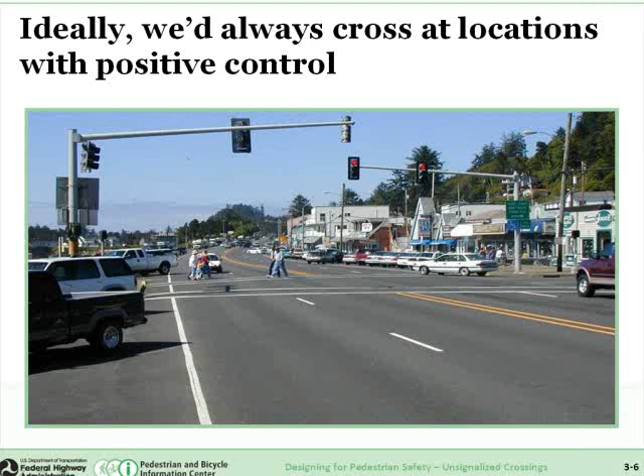Okay, and some people say, well, ideally we'd like to have pedestrians cross at a location with positive control, traffic signals. And while that may be appropriate, certainly at busy intersections or busy crossings, it's not always the best solution because, first of all, we cannot provide traffic signals everywhere, every 10 feet along our highways. That would be utter chaos. Traffic would slow to a stop.

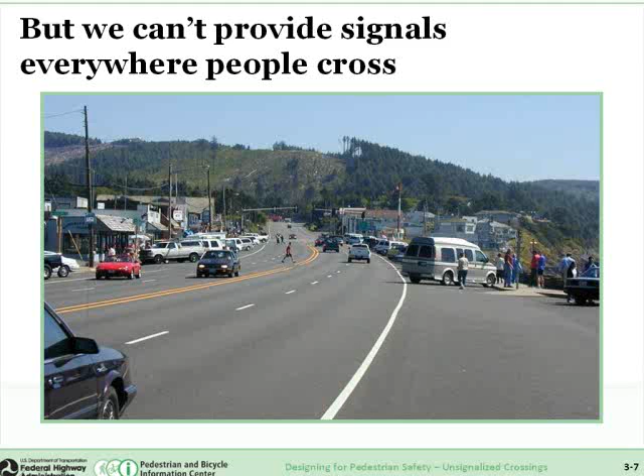And secondly, we know that many of our high pedestrian crash locations and high vehicle crash locations do occur at signalized crossings. So signals certainly have their place, and they're certainly appropriate in some conditions, but they're not the magic solution everywhere. We know motorists still can run red lights. Often motorists fail to yield to pedestrians when turning on a green, and other problems can occur.

And we know that these pedestrians are not criminals. Here we have provided parking on the right side of the street, and we have the stores on the left side. So people are going to naturally park in the parking areas and then cross the street, often where it's most convenient or the shortest distance.

And it may not always be possible for pedestrians to walk a block or two or three down to the signal to cross, plus knowing that that's not necessarily going to be an ideal location to cross anyway. And we also don't know whether there's a sidewalk on the right side for them to walk to get to the signal. So we just need to be thinking about pedestrian needs.

Also, pedestrian behavior. We know that some pedestrians use crosswalks and others tend not to. We know, for example, from the research that senior pedestrians, older pedestrians, are more likely to choose to cross in the marked crosswalks and to walk to the signals to cross, even though they do have some challenges sometimes to get to these crossings.

So let's look at a few basic principles. First of all, pedestrians want and need to cross the street safely. Hopefully we can all agree to that. Secondly, drivers need to understand pedestrians' intent. And we often see crashes involving pedestrians at unsignalized crossings where the pedestrian just doesn't know what the motorist is going to do and vice versa.

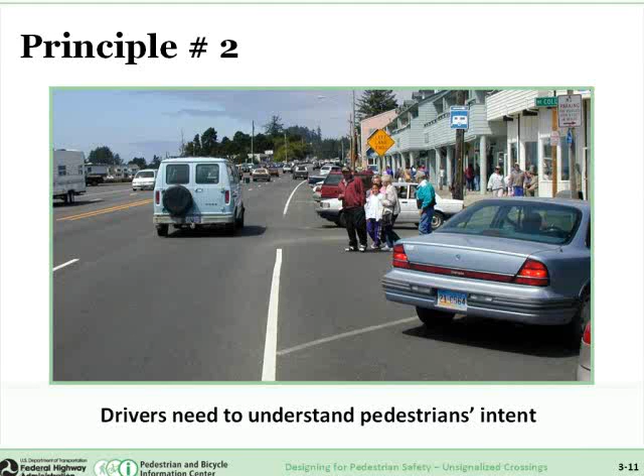But they asked the driver, why did you hit the boy? Didn't you see him crossing in the crosswalk? And the driver said, yes, I looked down, saw the boy, saw that he saw me, and I assumed he would wait for me. So here's an example of just misunderstanding about the rules of the road. At a legal crossing, the driver should have yielded to the pedestrian, and certainly the pedestrian assumed that would be the case.

Another principle, we need to try to keep our crossings short. We know that for long crossings, pedestrians are in the road for a long time, and that can lead to crashes. We also know that can result in increased motorist and pedestrian delay. And it can decrease the ability of slower pedestrians like this lady here to really be able to cross safely.

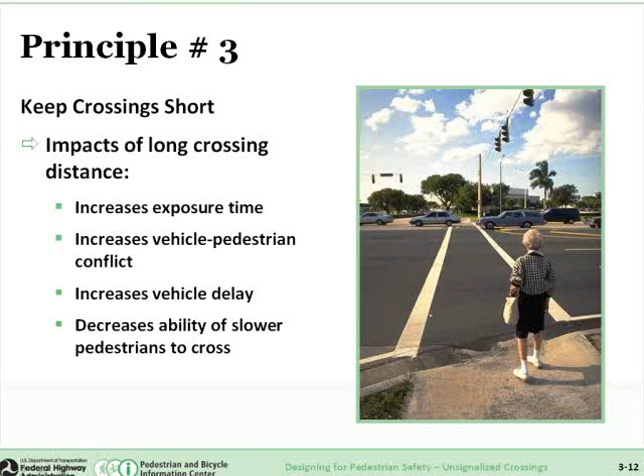There was an older lady in Los Angeles that didn't have enough time to get across the street during the walk signal a couple years ago. There's a newspaper article where there was an officer on the scene, and because she was delayed in finishing her crossing, vehicles got the green light and had to wait for her. So the officer ran over, gave her a ticket for slowing up the intersection. So her crime was that she didn't walk fast enough to meet the signal timing. So this is not the kind of environment we want to create.

The next issue relates to speed. There are three different ways that high vehicle speeds can increase the likelihood of pedestrian collisions: the reduced field of vision, the reduction in the motorist's ability to react in time to avoid the crash, and then increased crash severity at higher speeds.

Oftentimes we see collision reports where the driver hits a pedestrian and then gives a statement to the police: well, the pedestrian came out of nowhere. Well, the pedestrian didn't come out of nowhere. The driver just wasn't watching and was really fixing their eyes on the horizon ahead. And this is often what we see for the higher speed roadways.

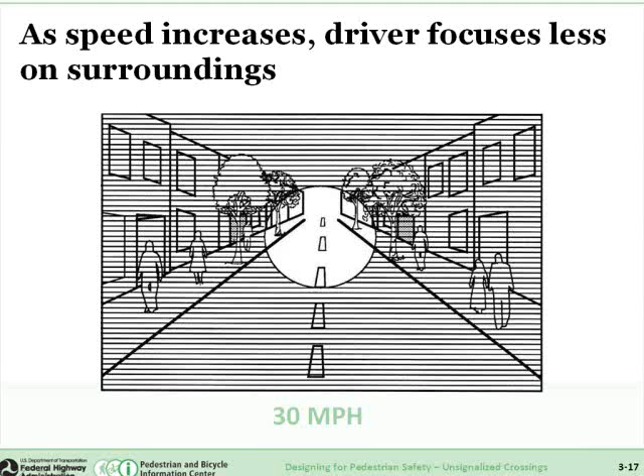And then the other component there is the braking distance. How long it actually takes a motorist to come to a complete stop after they've hit the brake. So if you look at the relationship between speed and stopping distance, you can see that at slow speeds, around 10 miles an hour, a motorist can stop in about 50 feet, whereas when they're going as fast as 40, it may take more than 300 feet to stop.

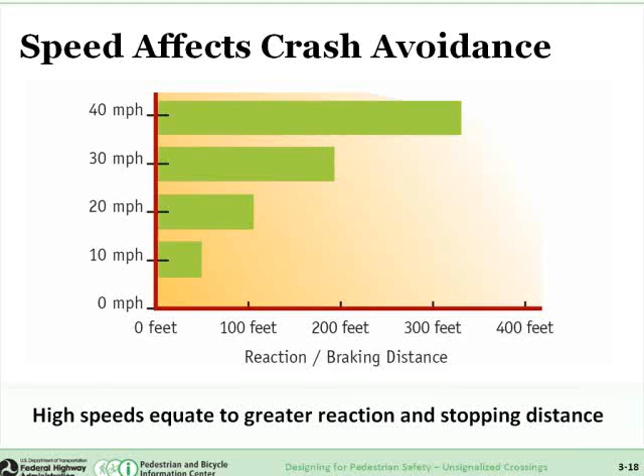Okay, the other factor with speed relates to the probability of death from a pedestrian that's struck by a motorist. And you can see, based on research from Europe a few years ago, if a motorist is traveling 40 miles an hour when they strike a pedestrian, there's about an 85% chance that pedestrian will die. If we can do something with the street design to get the speeds down to 30, that reduces the chance of death down to about 45%. And further down to about 15% if we can get the speeds down to around 20.

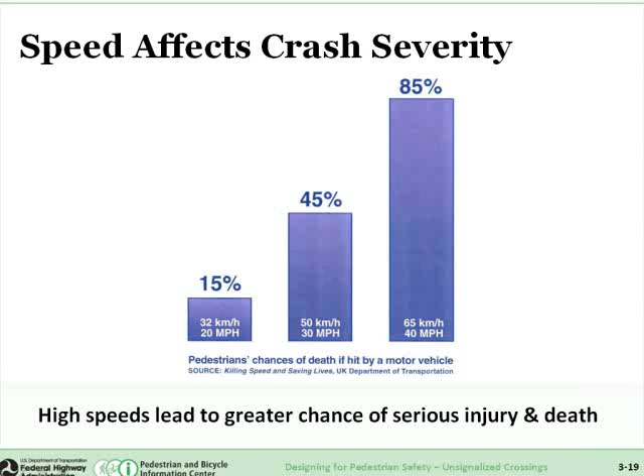Principle 5 says pedestrians will cross where it's most convenient. And again, humans will do what they feel is appropriate for them. People often want to use the shortest distance between 2 points. And while some pedestrians will go out of their way by several hundred feet to cross, most of us won't. Most of us will cross where it's quickest to get across the street. Now, as the volumes get higher, then that starts to complicate things. But just something to keep in mind as we're designing for unsignalized crossings.

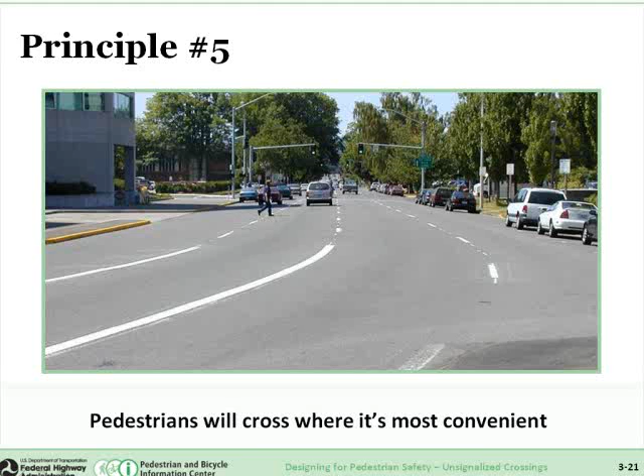Okay, now the issue of intersection versus mid-block is a little bit complicated because many of us have been taught from the time we were young to go and cross at the intersection, that was safer. And some of the research that's been done, some of the research we've done, actually indicates that whether a pedestrian is crossing at a mid-block or intersection doesn't make a significant difference when you take into account other more important factors like the number of lanes, the vehicle speed, traffic volume, sight distance, and things like that. So it really depends on other factors.

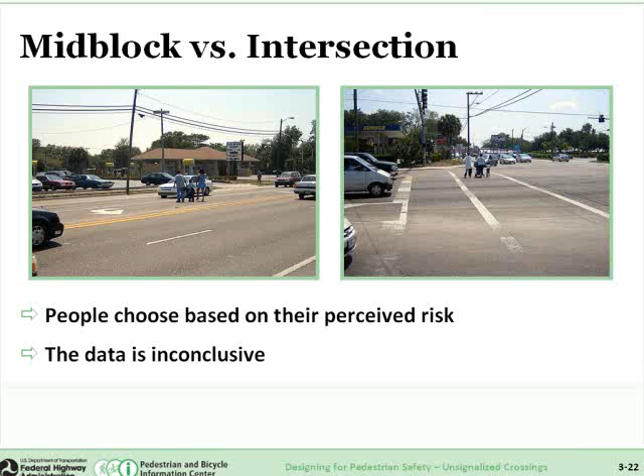Okay, Peter, could you just say a little bit about some of the new federal discussion, particularly by the Secretary of Transportation, about the need for us to provide for pedestrians? Yeah, Charlie. Recently, back on March 11th of 2010, Secretary LaHood put out a memo. It's the United States Department of Transportation policy statement on bicycle and pedestrian accommodation regulations and recommendations.

And this can be found on the web, but one of the important things that he stated in this memo was considering walking and bicycling as equal modes with other transportation modes, which is really huge and supports peds and bikes. And just something else to highlight, it says walking and bicycling should not be an afterthought in roadway design. So this memo was signed on March 11, 2010, and it was announced on March 15th.

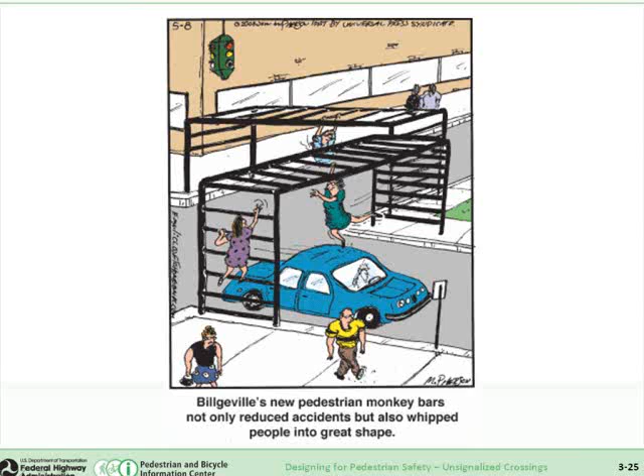Okay, what we don't want to do is end up having to make our citizens think they have to use these climbing bars, monkey bars, in order to get across streets safely. So often the public realizes some of the difficulties of getting across the street, and so you see these kinds of cartoons in different newspapers. But let's talk first about, what are crosswalks, why are they used, when should they be used, and what are some of the issues surrounding them.

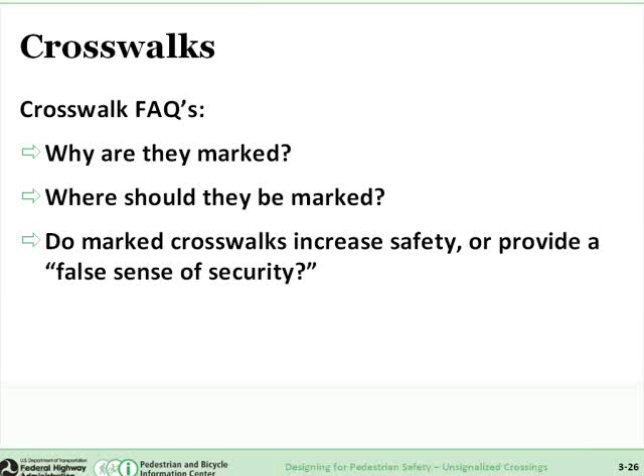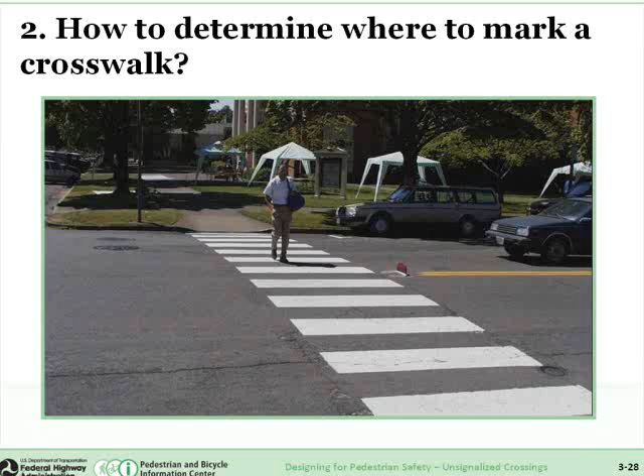We know that crosswalks are provided for two basic reasons. Number one, to indicate to pedestrians where it's a preferred crossing location, and two, to indicate to drivers where they might be expecting pedestrians to cross. And then the next question we have is, so how should we determine where to mark a crosswalk as engineers and planners? So I'm going to ask Peter to say a little bit about what's in the most recent MUTCD, Manual on Uniform Traffic Control Devices, the 2009 version.

Sure, Charlie. And thanks. You're going to go into the study a little more here, but based upon the latest research with regards to marked and unmarked crosswalks, the 2009 MUTCD picked up this information and incorporated it into the new MUTCD. So crosswalk markings provide the guidance for pedestrians who are crossing, as you stated, and for the driver as well. But did you want me to get into a little more about the actual MUTCD wording, or I can maybe provide that link as well? It's in section 3B.18 under crosswalk markings as far as the research to the study. Yeah, that's fine. And many of the engineers out there have seen the new MUTCD.

Okay, so if you see now the next photograph that says determine where to mark a crosswalk. And certainly we need to consider the origins and destinations of pedestrians. You can see in this case we have apartment buildings on the left, we have stores and bus stops on the right, and so this would be a logical place to put a marked crosswalk. And you can see they provided a raised median island here as well.

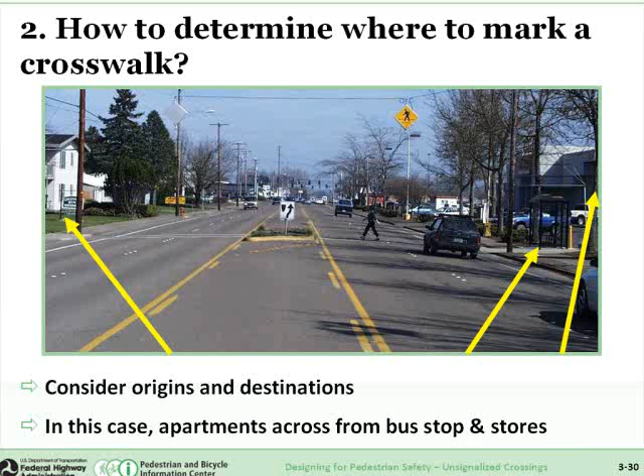Okay, and I might add that there are many locations that are not suitable for just a marked crosswalk alone. And here are some of the factors, examples. This location is not good to put a marked crosswalk because there's really no one location here where pedestrians would likely cross. Lots of fast food restaurants and different businesses, service stations, etc., along this arterial street. So it wouldn't make sense to just put in a crosswalk.

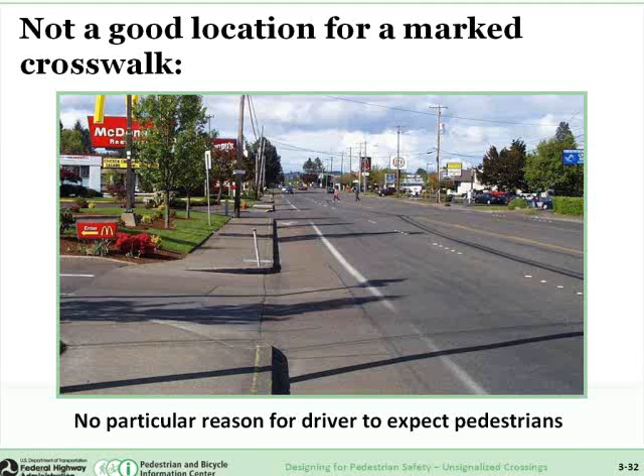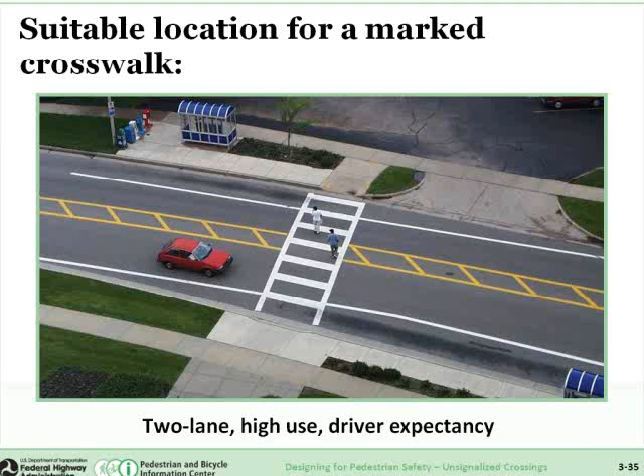Here's another suitable location for a marked crosswalk. It is actually near the Smithsonian Institute in Washington, D.C. They actually have a very wide marked crosswalk, lots of pedestrians there, low speed, narrow two-lane road, and it would be a place where motorists would very likely be expecting pedestrians and then very likely yield to them in a crossing like this.

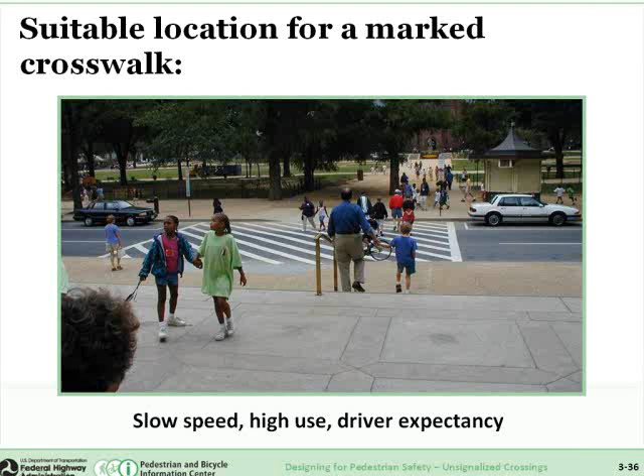Okay, the next question is, but do marked crosswalks increase safety or encourage people to cross without looking? So I'm going to say a little bit about a study we did a few years ago for Federal Highway Administration where we really tried to address the question, is it safer to mark crosswalks or not mark them at unsignalized or uncontrolled locations? And many of you know there had been some research done starting in the 1970s by Bruce Herms in San Diego, for example, that said that having a marked crosswalk had an increased risk of pedestrian crashes compared to an unmarked crosswalk.

And for years after that, many cities in the U.S. simply wouldn't put in marked crosswalks unless there was a traffic signal there or maybe unless it was in a school zone. And so essentially, when we did our study, we really wanted to look at this issue and use data from cities around the U.S. So we ended up using around 2,000 crosswalk locations in 30 U.S. cities. We collected 5 years of pedestrian crash data. We collected pedestrian volume, traffic volume, number of lanes, speed limit, and other roadway factors.

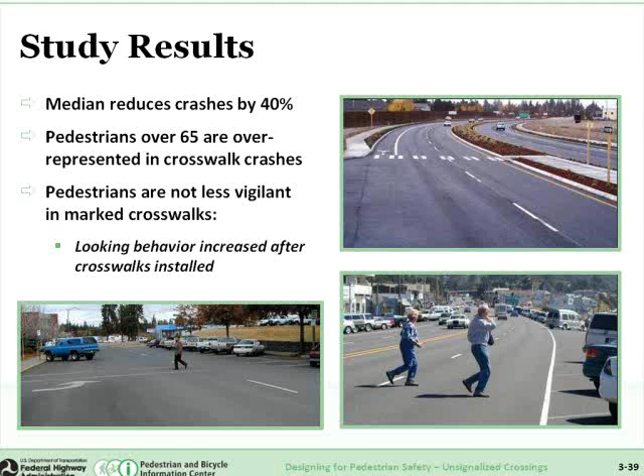We also had a study done at the same time of ours to look and see why this was happening. And they looked at pedestrian behavior and driver behavior. They did not find that pedestrians were being more careless or using less caution in the marked crosswalks, which was kind of an interesting finding, at least on the 2- and 3-lane roads. But we're going to look at some other issues in just a minute. I'm going to give you the second reason in a minute why the marked crosswalks had more crashes and what we can do about it.

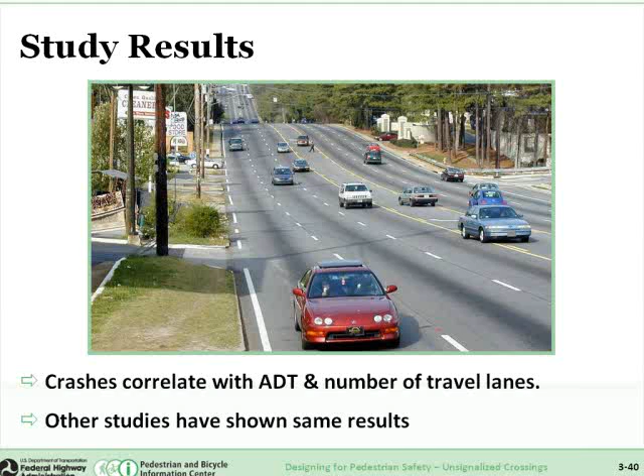As I said, the higher volume roads with a greater number of lanes were the ones that had the most pedestrian crash risk and the ones of most concern for pedestrians in general. And here's the other reason. The main reason why crashes increase in the marked crosswalks and multi-lane roads that are high volume is because we had a number of these what we call multiple threat crashes.

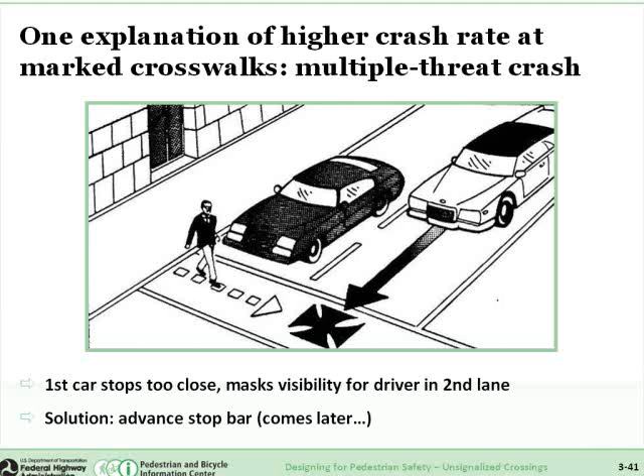Okay, so essentially our recommendations were that it's okay to mark a crosswalk on two-lane roads or the low-volume multi-lane, but on the higher-volume multi-lane, we need to do more than just mark crosswalks alone to help pedestrians get across the street.

And really the key is the new marked crosswalks alone, right? That you don't want to just put crosswalks out there by themselves. You do want to use them in conjunction with other countermeasures that you're going to be bringing up. And it recognizes that just marked crosswalks alone under these type of conditions should not be done. So it's really the greatest and latest guidance for how agencies should be looking at their crosswalk markings inventories.

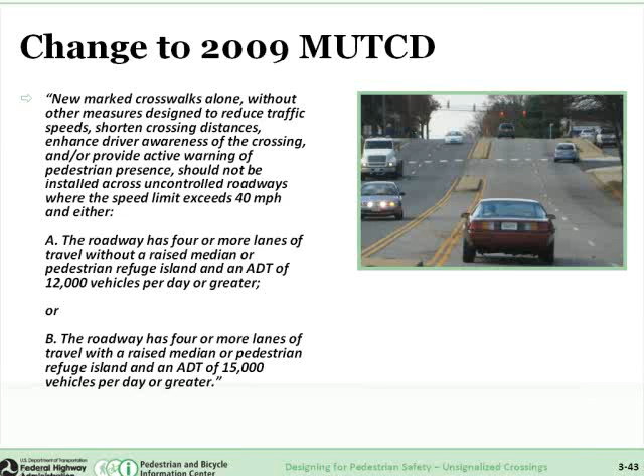And so really, having taken a look at the study and doing probably an inventory of all your crosswalks and understanding what the latest guidance should be, the agency should be looking at that. Yeah, so another good reason why we should pay close attention to the MUTCD and AASHTO guidelines, right, Peter? That's correct. Okay, let's look at situations where it's appropriate to put in marked crosswalks and where you may need more treatments. What are some of these other treatments and measures that may be appropriate?

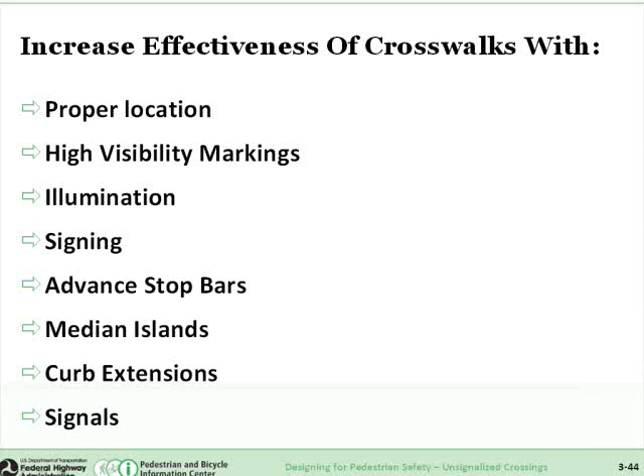Okay, and the one analogy that some of you have heard me give is, sometimes we'll go to a place and the engineer raises his hand and says, well, if marked crosswalks don't make us safer, why don't I just go take out all the marked crosswalks and be done with it? And we say, well, you tell me why that isn't a good solution. And obviously the answer is because it doesn't really help pedestrians get across the street. And the example I gave is if I had a broken arm and went to the doctor and said, doctor, I want some aspirin for my broken arm, the doctor would say, well, the aspirin's not going to cure your arm.

If the doctor just said, so go home, have a nice day, and you'll be fine. Well, the doctor hadn't helped that patient. The broken arm is still there, and a better doctor would say, well, you need more substantial treatment than aspirin alone. And that doctor will say, well, I need to set the bone, put a cast on the arm, and then give you the aspirin or the painkiller. In other words, a more substantial combination of treatments to really heal the broken arm. And that's what we really have to be thinking about.

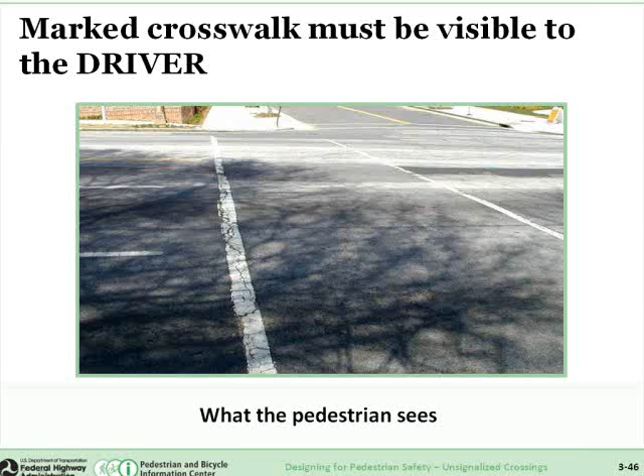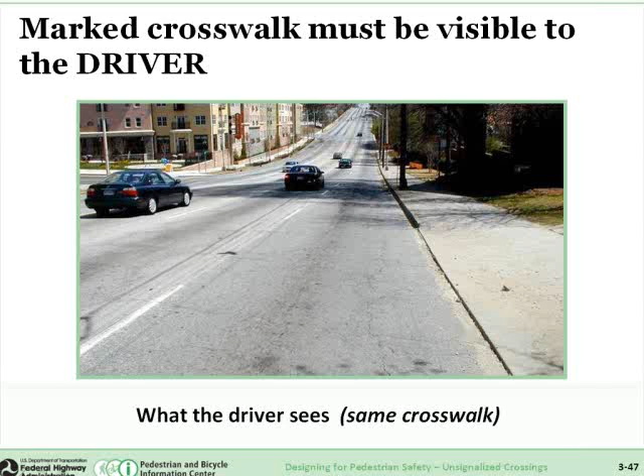So for situations where you do have a marked crosswalk with or without other treatments, we need to make sure that the crosswalk is visible to drivers. Okay, so many of you, if I ask you, can the pedestrian see this crosswalk, you'll say sure. And then if I said, do you think the oncoming motorist from the left or right can see it? The answer is no. And this is the driver's viewpoint of that crosswalk as they approach from either direction. It's virtually invisible to the driver. So why have a crosswalk out there, if a driver can't see it?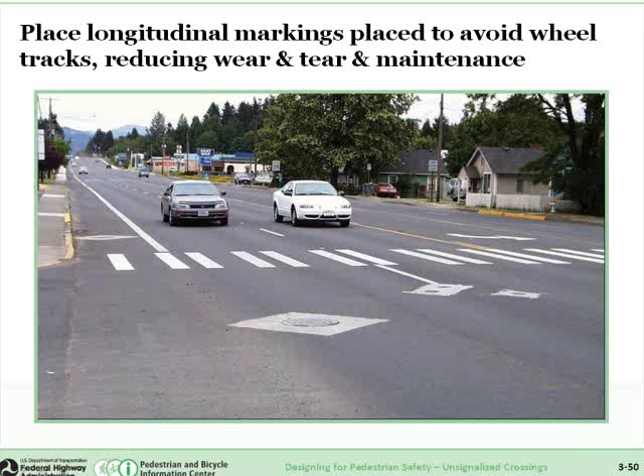Here's an example of where the agency has actually staggered the wheel paths so that the wheels don't run over the paint. And agencies like Orlando, Florida have gone to more of this pattern as a standard practice, and they claim it actually saves them money in the long run in terms of not having to keep replacing the parallel line markings that get worn away fairly quickly.

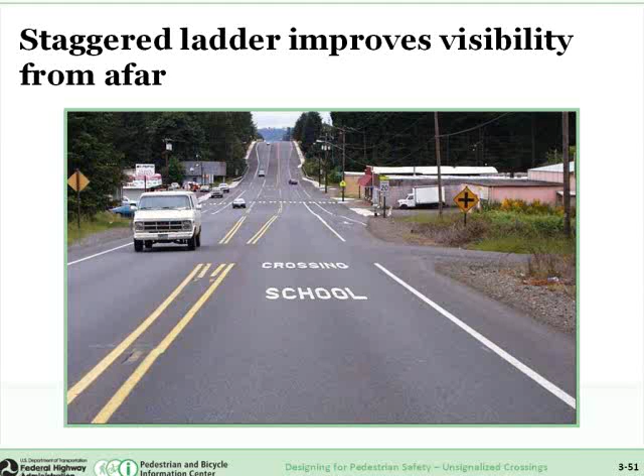Okay, and here is sort of a driver's view of what the staggered ladder would look like, of the continental style, from several hundred feet away. You can really see that crosswalk, and also there's a supplemental signing, the school crossing pavement marking. So it's really a lot better marked for drivers.

Now, nighttime presents a lot of risk issues for pedestrians. We know that the risk for a pedestrian crash is much greater at night than during the day for obvious reasons. We know from some of the NHTSA research from the National Highway Traffic Safety Administration that if a pedestrian is wearing even a white shirt, walking at night, crossing the street, or walking along the roadway, that a motorist with low beams can only see that pedestrian and tell it's a pedestrian when they're less than about 200 feet away. And if a pedestrian is wearing dark clothing, a dark shirt or blue clothing, a motorist cannot see that pedestrian and identify him as a person until the driver is only about 40 to 60 feet away.

And that's certainly not enough time for a driver to recognize a pedestrian, hit their brakes, and stop before striking the pedestrian. So these are the issues. Many pedestrians don't realize that. They assume that because they can see the oncoming headlights of the motorist, that the motorist can see them just as well, but that's not the case.

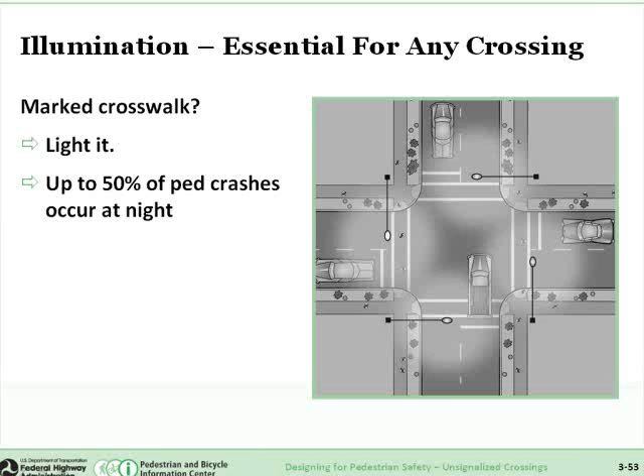So what can we do from the roadway standpoint in terms of improving lighting for pedestrian crossings? I'm going to show you a few illustrations of lighting examples. Traditionally this is what we would do, we would put the lighting over the crosswalk. We do know that in well-lit locations having overhead lighting can reduce pedestrian crashes. In fact, some of the crash reductions range from about 42% of pedestrian crashes at night that are prevented up to about 54% at intersections.

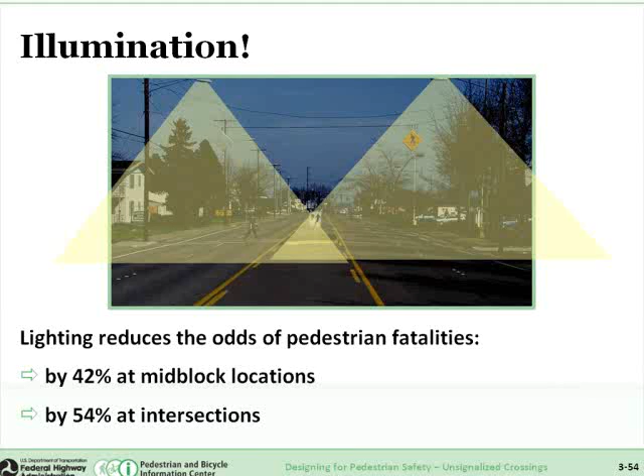And while we were showing you what we call crash reduction factors, sort of the new terminology now is crash modification factors. So that would be 1 minus 0.42 or 1 minus 0.54. But still, you get the picture. About half of pedestrian crashes can be reduced at night if proper illumination is used.

Now, there's a fairly new study, actually a couple years ago, that was done by a gentleman, Professor Gibbons at Virginia Tech. And he really was able to get in and do some analysis of the types of lighting that best benefit pedestrians at mid-block locations.

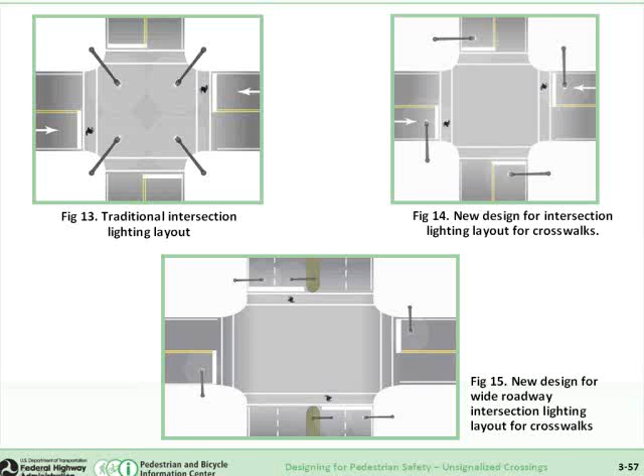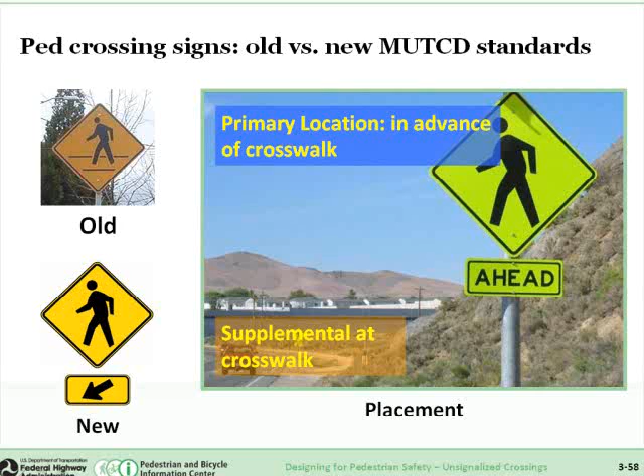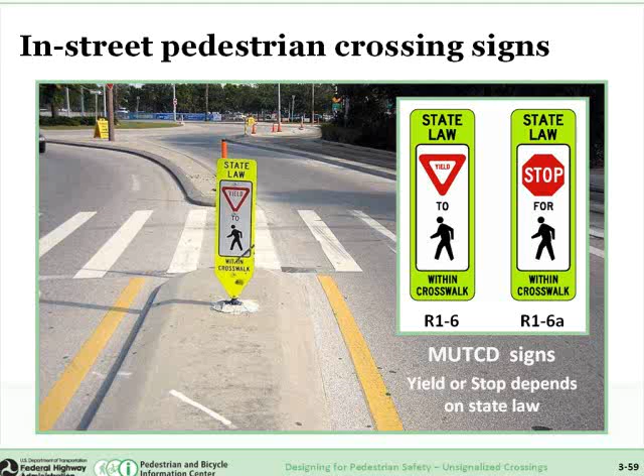And we've actually done some research on these and found that motorist yielding behavior does increase. We evaluated about six of these in New York State at 2-lane or 3-lane crossings on lower speed downtown locations. And so it increased from about 30% up to about 60% of motorists yielding to pedestrians after the signs were put in. But still, my question is, what about those 40% of motorists that are still not yielding? Is that going to cause a potential pedestrian crash risk?

So anyway, it is one option, but I wouldn't necessarily recommend this on higher speed, multi-lane roadways with high volumes. We just don't know enough about these signs in terms of where they're effective or not effective. There is a higher level device that's not currently in the 2009 MUTCD, but it has gotten interim approval by the National Committee on Uniform Traffic Control Devices. It's called the Rectangular Rapid Flashing Beacon.

And this is essentially a device that has a pedestrian warning sign with a down arrow at the crosswalk and kind of an unusual or stutter flash, we call it, similar to the flashing light on the top of a police car. And basically, this irregular flash does seem to get the driver's attention more so than the old-fashioned flashing yellow ball. We also call it the wigwag flash.

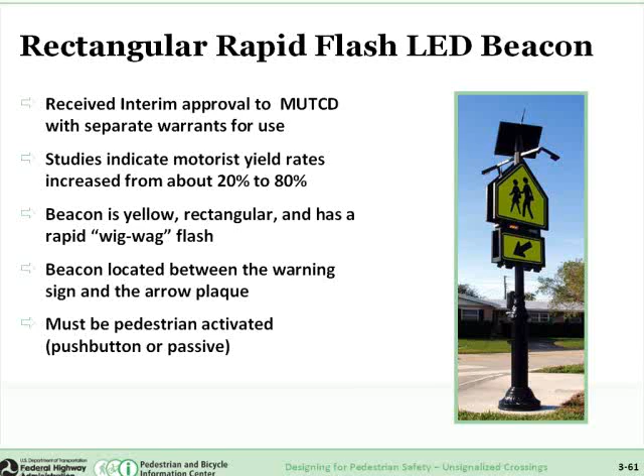Hey, Charlie, quick note. Yeah, go ahead. With regards to if people want to see a video of that, if they have access to YouTube on their computers, they can type in Wilmington, North Carolina, right there in your neck of the woods, Rectangular Rapid Flash Beacon. They can see a video of that.

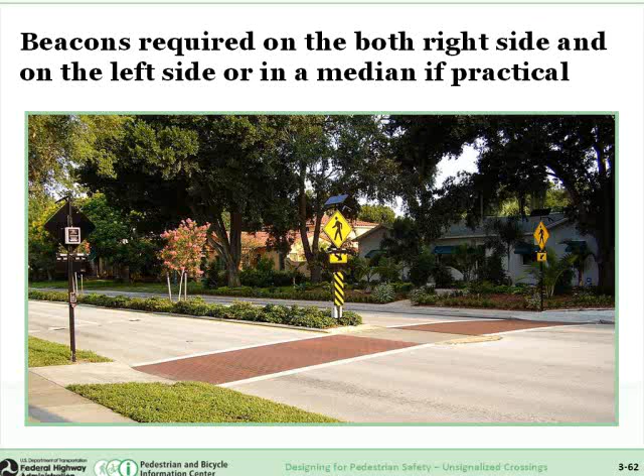Of course, you would want to have well-marked crosswalks, possibly illumination, and the advanced warning sign as well. Now, what they've also done is they've used the advanced yield line, which we're going to talk about next, in conjunction with these rapid flash beacons.

And sometimes people say, well, we have a multi-lane road. We need to have multi-lanes to handle the traffic volume. So what can we do to help reduce this multiple threat crash? And so the answer is, well, consider the advanced yield lines or advanced stop lines. We know that, as we saw before, where you do have this multiple threat crash, the first vehicle stops on the crosswalk, and that blocks the view of the oncoming vehicle from the pedestrian.

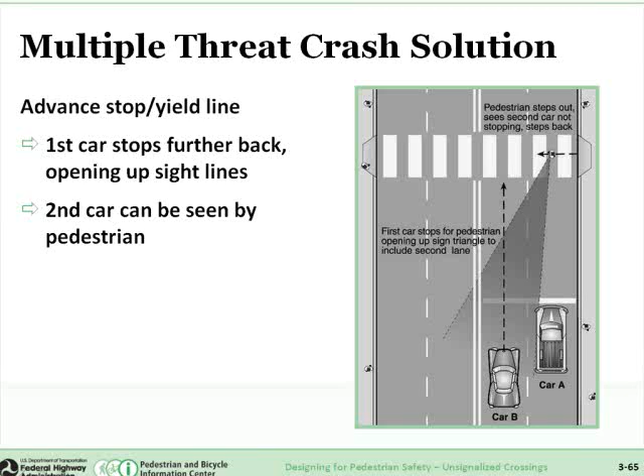So if we can really look at this kind of scenario where we have a pulled back or advanced stop line or yield line that's located between 20 and 50 feet on the approach to the crosswalk, then the idea is that car A will stop back of the crosswalk, opening up the sight distance so the driver of car B can then see the pedestrian that's stepping out into the crosswalk, and also the pedestrian is more likely to be able to see the oncoming vehicle B in this case. So either the vehicle will have time to stop for the pedestrian, or the pedestrian would have time to avoid the collision.

Now, when you use either the advanced stop line or the advanced yield line, it's important that you use one of the signs that you see here. Again, the yield signs, yield here to pedestrians in the yield states, or the stop here for pedestrians in the stop states. And the stop sign was adopted in the 2009 MUTCD.

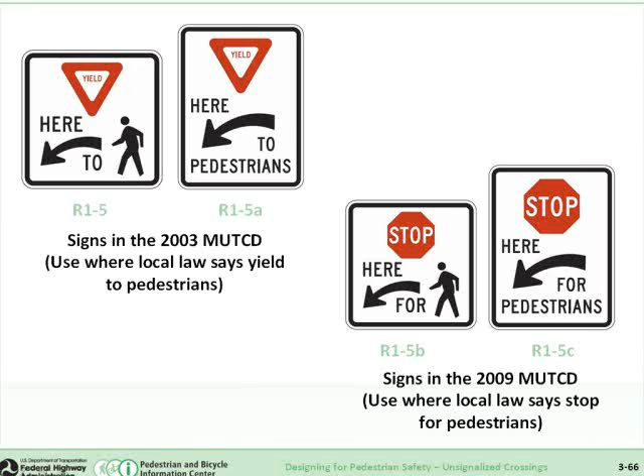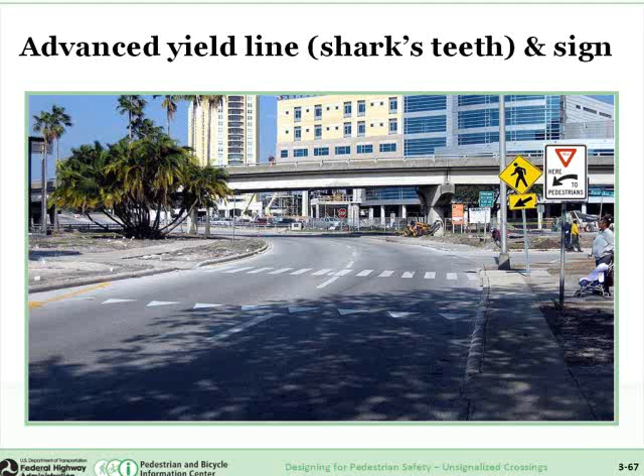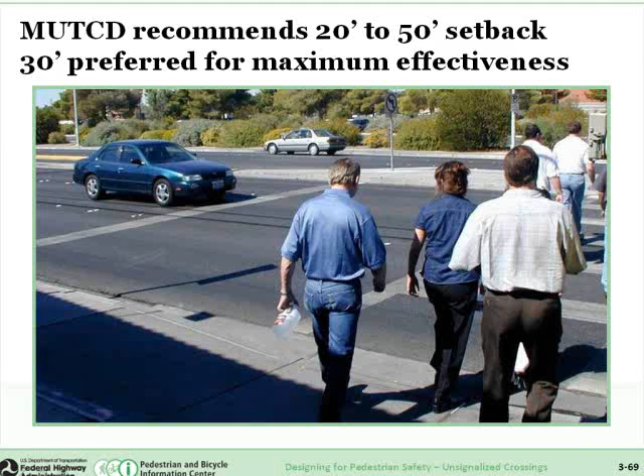Okay, so in summary, on the crosswalk issue, again, it's okay to put in a marked crosswalk on these two-lane roads, lower volume, multi-lane, lower speed roads, but you don't have to put a marked crosswalk everywhere. Again, on some of the really low-volume local streets, there's some question about whether that's justified or not. So that's kind of an agency decision there.

But in terms of the higher volume multi-lane, you have to be careful about using marked crosswalks alone. We really need to think about what is needed there to help pedestrians get across the street safely. Like, what do you need to fix this broken arm? You need to have a full complement of countermeasures. Pick the right treatment for the situation.

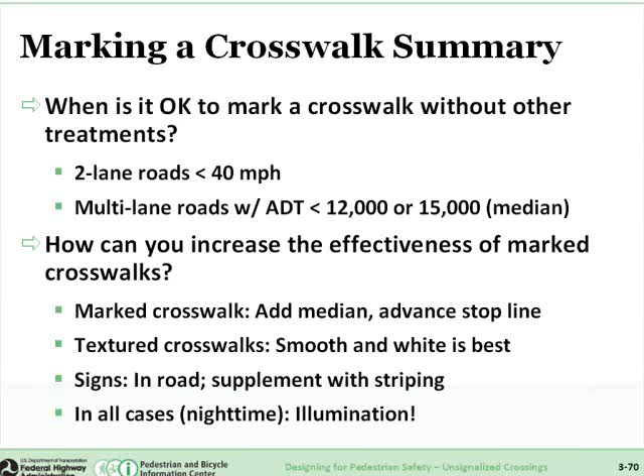Okay, for raised median islands, remember we talked about the benefits that you can gain from having raised medians or raised median islands on multi-lane roads. You can reduce about 40 to 45% of your pedestrian crashes on multi-lane roads. So that's a huge reduction in crossing crashes, and something to really keep in mind on your multi-lane roads where pedestrians are having crash problems.

All right, let's look at the continuous raised median, with the basic principle being that it breaks up a long, complex crossing into two simple crossings. Pedestrians have a place of refuge.

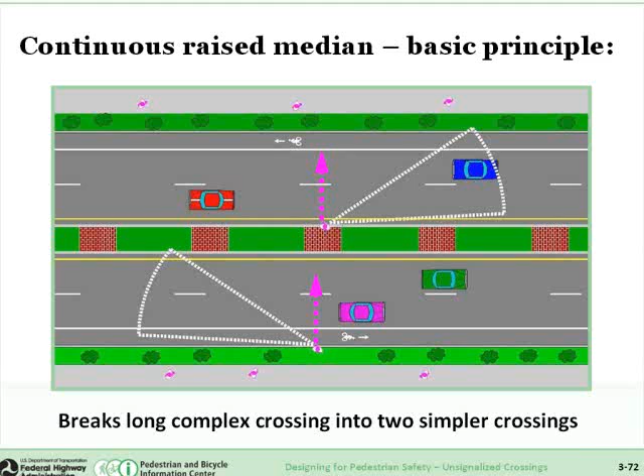They only have to look to the left, worry about traffic in one direction at a time, cross to the median, and then look to the right, make sure it's clear, or make sure motorists are yielding before they cross the second half of the street.

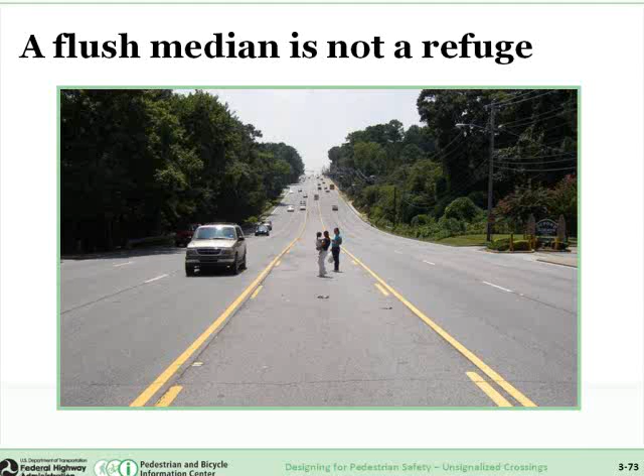And so, again, looking at the two steps in the crossing, and here, this example, when they get to the median, some agencies are using kind of a stagger or an angle cut through in the median, so pedestrians will kind of be forced to look to the right because their body's turned to the right, and they can hopefully see oncoming traffic and not be as likely to step out into the street in front of the traffic on their right.

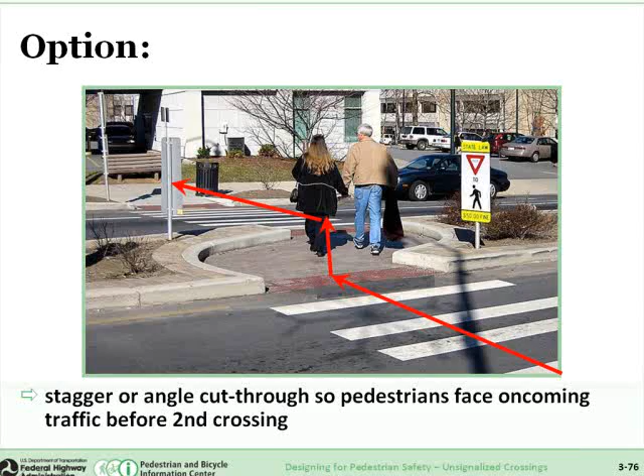Okay, pedestrian signals. This is another option if a signal is warranted, and we do have some revised language in the new MUTCD warrants. It is now easier to meet the pedestrian volume warrant. In one of the later sessions, the modules that will be given on pedestrian signals, we'll be getting into some of the details on that. So we're just going to kind of skip over it for now.

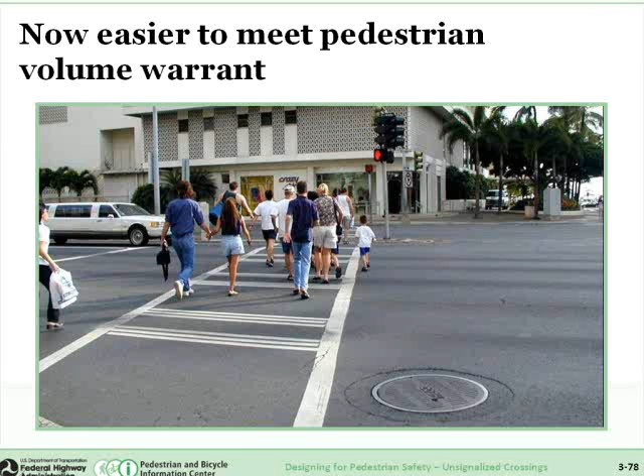But it is easier to meet this warrant to add a traffic signal with pedestrian walk, don't walk signals for pedestrian crossing locations. We recommend that where you do install a traffic signal with pedestrian heads, that you have what we call a hot button or a quick response, so pedestrians push the button and don't have to wait long periods of time before the light changes.

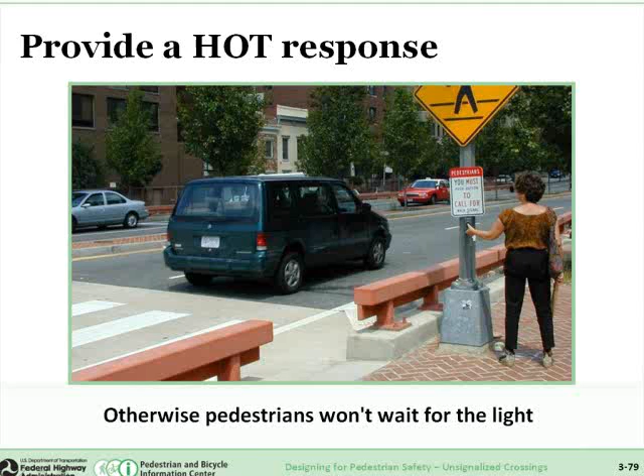Because otherwise, pedestrians will push the button, won't wait for the light, and then they'll cross against the light, and then traffic will be stopped on a red light where there's no pedestrian waiting. So it's just kind of a common sense thing. And you can see this is what happened in this case.

In the other module on signals, we also talk about things like automatic pedestrian detectors and some of the more advanced signals, things like leading pedestrian intervals and things that can really also further benefit pedestrian safety at signals.

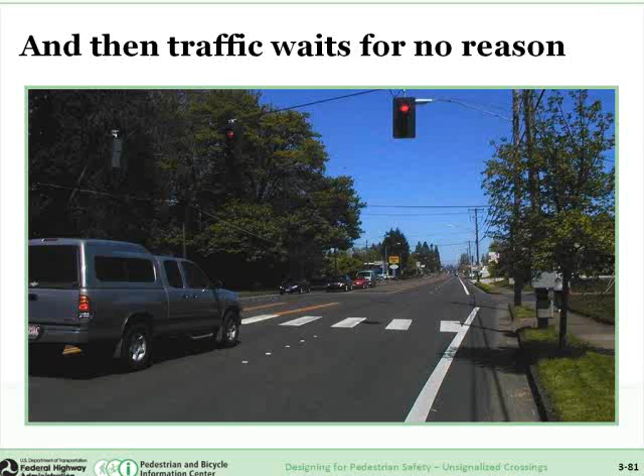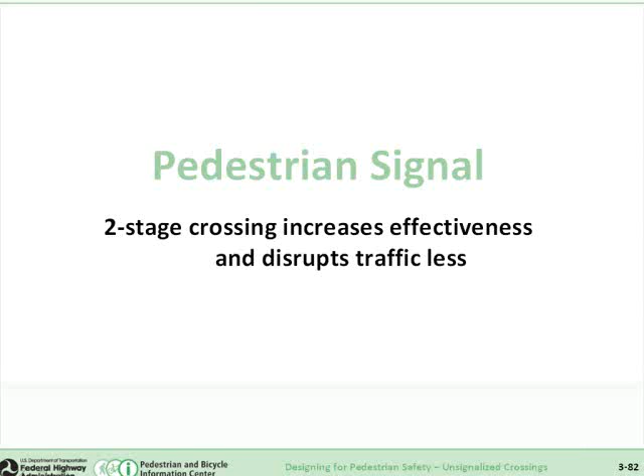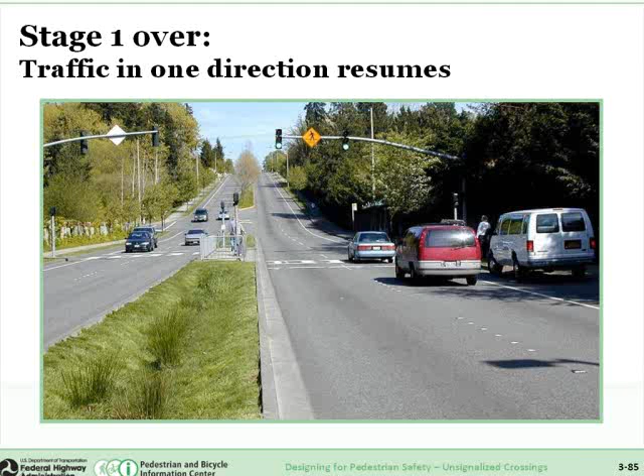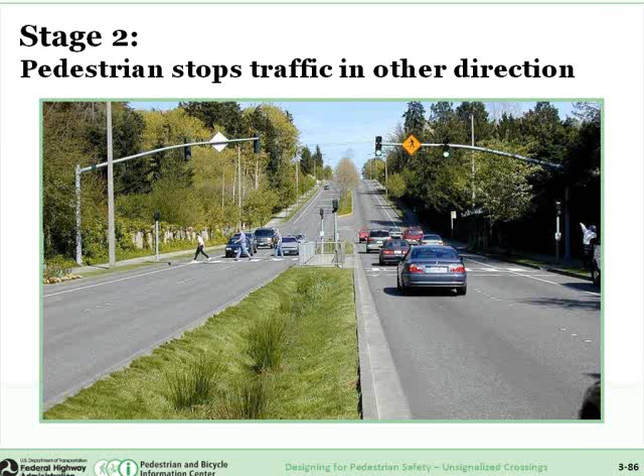And meanwhile, the traffic has been flowing from the right. Push the button, which stops traffic coming from the right in the second direction. Meanwhile, traffic continues from the first direction. Pedestrians finish crossing on a new walk signal there, and then traffic resumes.

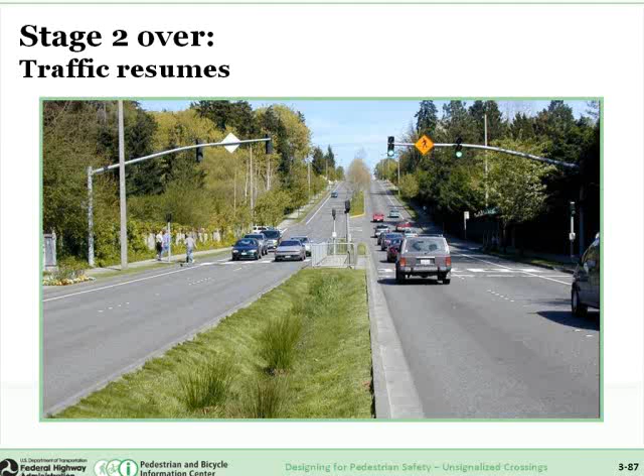So you see what's happened really is we've minimized the delay to pedestrians. You get a push button for each of the directions. You've limited your delay to motorists. They only have to stop for a short while. Some of the details that are required to make this work is you have to have a push button in the median to make sure pedestrians push two different buttons. And you do need the fencing to channel pedestrians in the median to get to the second push button.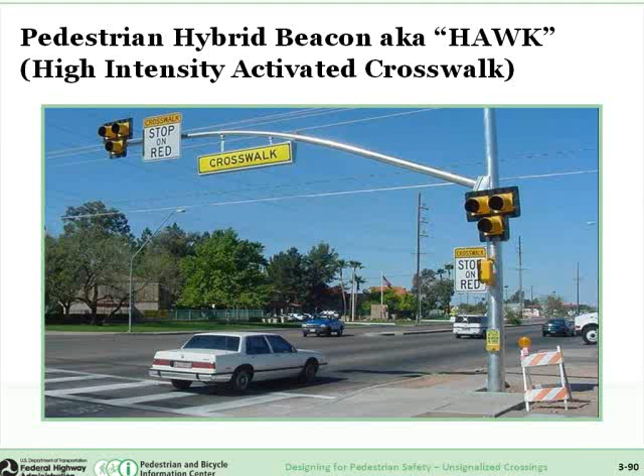Okay, another device that I would consider a higher level traffic control device, not quite a full-blown traffic signal with signals in all directions, is what we call the pedestrian hybrid beacon, which has been called the HAWK signal, or the High Intensity Activated Crosswalk. So it's a new device that is approved now in the 2009 MUTCD. And Peter, why don't you say a little bit more about the HAWK, or the pedestrian hybrid beacon?

Sure. Well, I'll talk about the crash reduction factor, if you like. It is in what we have, the CMF Clearinghouse. If people want to access that, www.cmfclearinghouse.org, where they can get the crash modifications for not only the HAWK but others. But for pedestrians, the HAWK has a crash reduction factor of 60%. So very effective, and I'm sure you'll go through the sequence of how this works. But as far as the crash modification factor, or crash reduction factor, I should say, 60%.

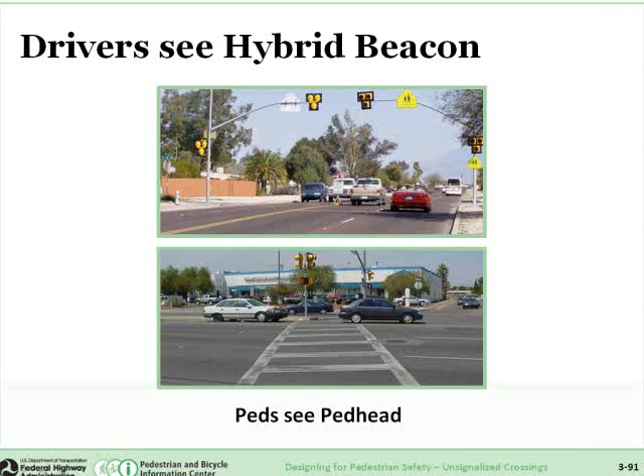Okay, thanks, Peter. And what I'm going to show you now is the sequence. Do you want to talk a little bit about the sequence of the signal? Okay. Oh, by the way, I guess we should mention in the 2009 MUTCD, this is for mid-block only applications, in that the picture you might have just saw was one of the experiments during the experimental process that Tucson was going through, and so they showed it at an intersection. But the application of the HAWK is at mid-block only.

And what you'll see here is the three-head stage, basically 3 heads, and that's sort of to help not to confuse it with a railroad signal. But it's blanked out when there's no activation, and then as soon as the pedestrian pushes the button, it'll go to a flashing yellow. Obviously, we don't have the animation here yet, but stage 2 is the flashing yellow. That should be flashing. And then on stage 3, it goes to a steady yellow. Then stage 4, when it goes to the red, is when the pedestrian actually gets to walk.

And then once the pedestrian clears their half of the roadway, the traffic signal engineer can time that, and then it goes to a flashing wigwag. And that's when the flashing hand would start appearing. During that wigwag stage is when vehicles can actually start crossing their half of the roadway, if they choose to. It's sort of interesting in some of the videos that I've seen that vehicles will tend to not even move on the wigwag, but they'll wait for the final stage where it goes to blank again, and then they'll proceed. So it's actually a safer situation.

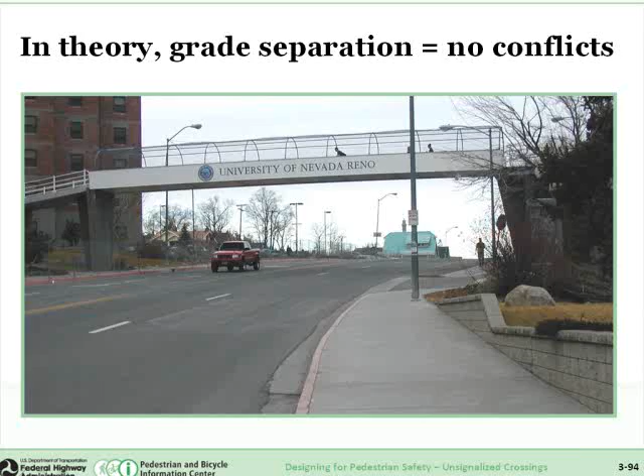Okay, now we're going to talk about sort of a countermeasure of last resort: grade-separated crossings, overpasses, underpasses. In theory, grade separation means no conflicts, no crashes, right? Well, that's not exactly the way it works, because we know that overpasses, for example, are sometimes placed at locations where pedestrians don't use them, or at least many pedestrians don't use them. In fact, some of the earlier research said that pedestrians had to be able to cross the street quicker by using an overpass or underpass than crossing at street level, or nobody would use it.

And you can see that to be the case here. This pedestrian is walking right under the overpass, and this is on a 4-lane road. So think about the cost of installing that overpass, but yet there's another pedestrian waiting to cross at street level too. So you can spend a lot of money on grade separation, and we need to be very careful before we commit to doing that. Make sure that that is the best solution and it's the right solution.

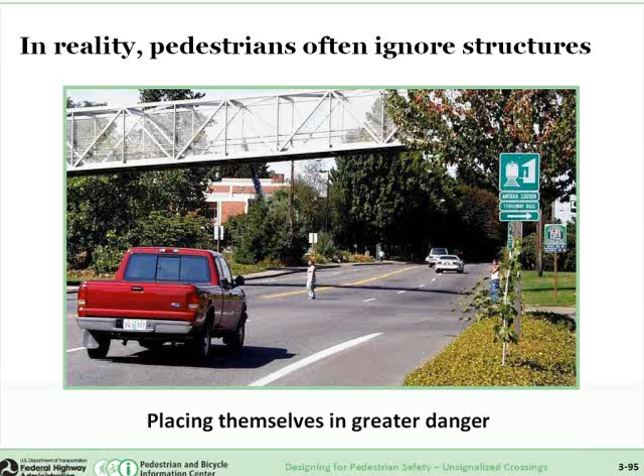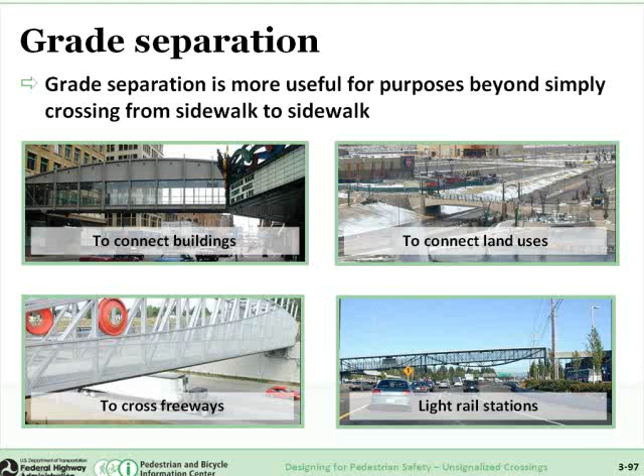Overpasses are very expensive because you have to meet height requirements and also require long ramps. They have to meet ADA requirements for any new grade separation. So they're really not an inexpensive thing at all. So they're really kind of a last resort, and consider other treatments, at-grade treatments, before you invest money in this.

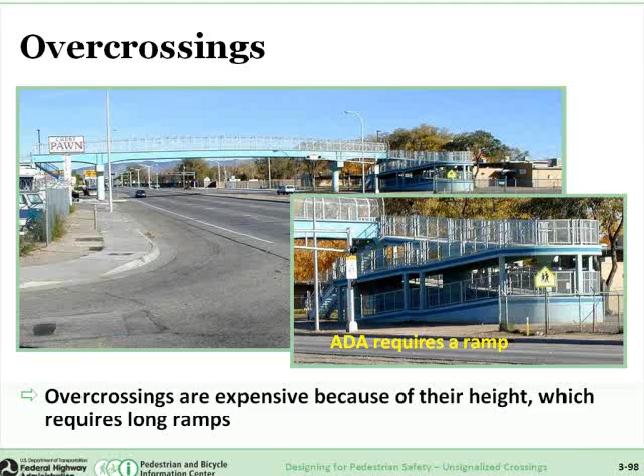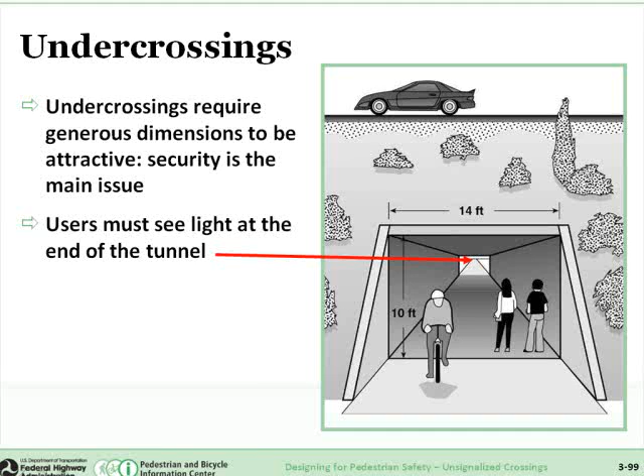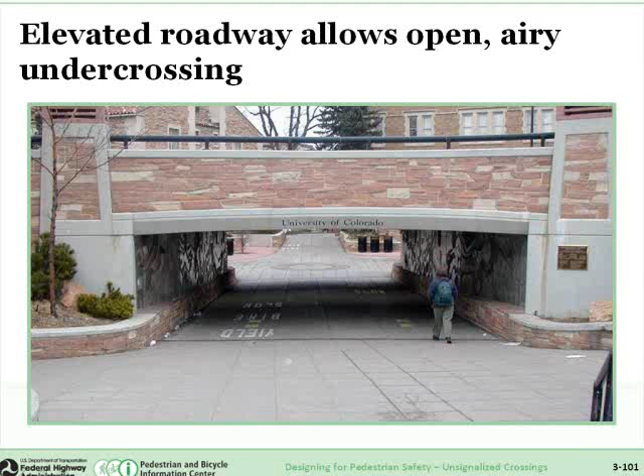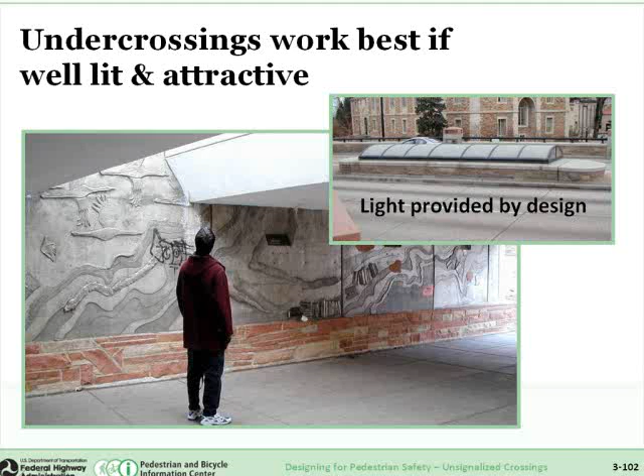They need to be well lit. This particular underpass has some artistic touches to it, and certainly would be much more used and much safer for pedestrians compared to crossing at street level. You can even see the lighting, the natural lighting that comes in here on the skylights.

But we know that signing is inexpensive, but its effectiveness is really not going to be very great. If you have a serious pedestrian crash problem, you're probably not going to be able to solve it completely with signs and paint alone. As you get into more of the substantial treatments, the raised median islands, even the advanced yield lines or advanced stop lines, these are more likely to be able to help to solve a pedestrian crash problem, especially on some of the multi-lane roads.

And when you get up into the signals, when we talked about the rectangular rapid flashing beacon, the HAWK signal, these are also options that are feasible, allowable now, and may be considered versus the overpass, underpass, where you're going to spend a fortune. The key thing in all of this is that we try to choose the right solution for the given problem. And picking the proper location for a given treatment, we say is priceless.

Now, one of the other basic concepts is right design invites right use. So if you have a location where pedestrians are doing all kinds of things that seem to be unwise, or you don't understand why they're crossing where they are or the way they're crossing, oftentimes it gets back to the design of the roadway and maybe some deficiencies in the crossing itself.

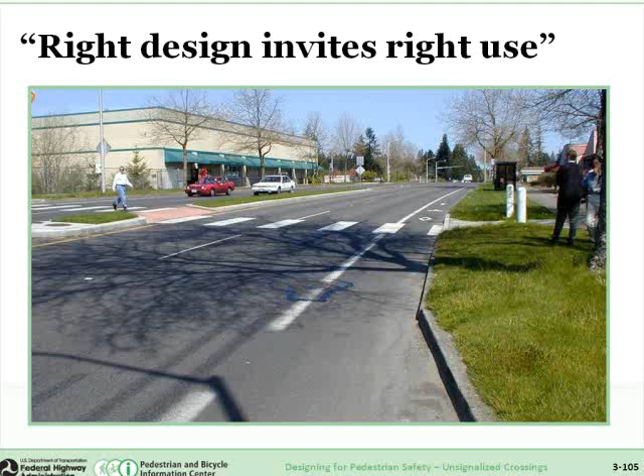And I have to always add that while many of these treatments can be effective in reducing pedestrian crash risk or crash problems, we also know that we can't solve all pedestrian crash problems with roadway and engineering treatments alone. We also need to work with other stakeholders and partners like educators, like public health officials, to make sure that there is proper education for kids in the schools, for pedestrians of other ages, for drivers.

And of course, the other ingredient that we will mention is that it's important to sometimes use enforcement, selective enforcement, so drivers are given warnings or tickets when they speed, run red lights, or fail to yield to pedestrians in legal crosswalks. So if we can keep all these different countermeasure options in mind, think about all the different ways that pedestrians cross and the factors that can not only cause increased crash risk, but can be the countermeasures used to improve safety, then we can really improve the walking environment for pedestrians.

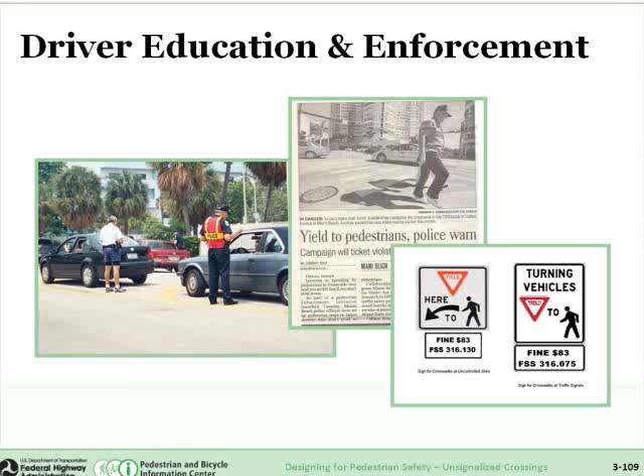Are there guidelines for conditions that would warrant a crosswalk at an uncontrolled location, such as number of pedestrian crossings, vehicle speed, vehicle volume, roadway width, distance to nearest controlled crosswalk? All right, well, let me try to answer that. We actually came up with some recommended guidelines, not only the ones that we read and that are now part of the MUTCD on when you don't want to use marked crosswalks alone, but we also had some general recommendations on conditions that would deserve to have a marked crosswalk.

In other words, we know on a lot of our local streets, some cities have hundreds and hundreds of miles of local streets with very low speed, very low volume, and it can be very expensive to put a marked crosswalk on every single intersection on every local street in the city. We're not recommending that. In fact, we came up with some sort of minimum pedestrian volumes that we'd recommend that might be suitable to justify spending the money on installing a marked crosswalk and maintaining them.

Because once you install the marked crosswalk, you want to make sure that they're visible and well maintained, like we talked about. But the MUTCD doesn't say you absolutely must have a crosswalk under these conditions at unsignalized locations. That is left up to the judgment of the engineer and planner.

I would add that we haven't really talked much about signalized intersections, and while you're not required to put in marked crosswalks at signalized intersections, I can't think of any reason why you wouldn't. I mean, if a traffic signal is warranted, particularly with walk don't walk signals, why wouldn't you put in a marked crosswalk? And certainly we have criteria in school zones for putting in marked crosswalks, and there certainly needs to be an indication to the children of where is a preferred crossing location for them to cross the street.